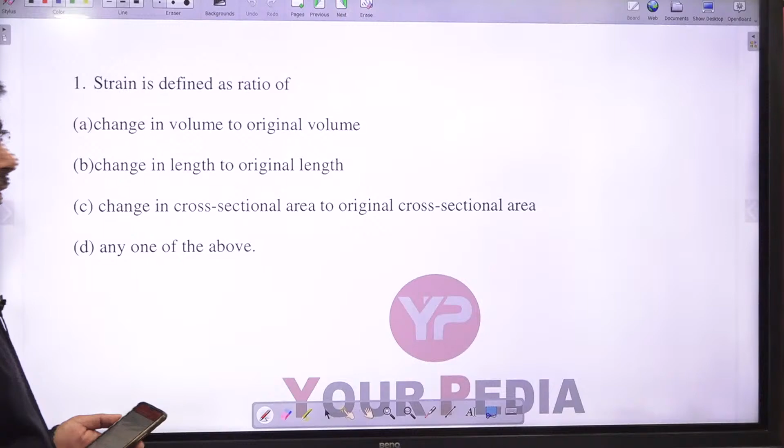You can see the first question on your screen. Just see it and tell me the correct answer. The first question is: strain is defined as the ratio of what? Tell me which one is the right answer.

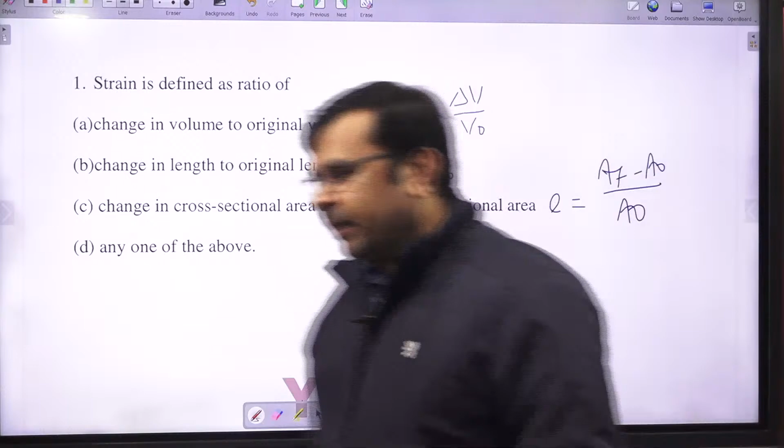So the correct answer is option D. Strain can be represented in any form - that's why the correct answer is option D. Here it was not asked to find the longitudinal strain, lateral strain, or volumetric strain specifically; these are all forms of strain. Is that right? Okay, let's see another question.

So this is the next question. During a tensile test on a specimen of 1 centimeter square cross section, maximum load observed was 80 kilonewton and area of cross section at neck was 0.5 centimeter square. Then what is the UTS of the specimen?

Tell me. UTS means ultimate tensile strength. At UTS, the area you can see here is given as 0.5 centimeter square.

As you know, engineering stress can be represented by load, instantaneous load over original area - don't forget to write this expression, P by A naught. So at the UTS point, meaning at the maximum stress point, the load is 80 kilonewton, that is 80 into 10 to the power 3 Newton.

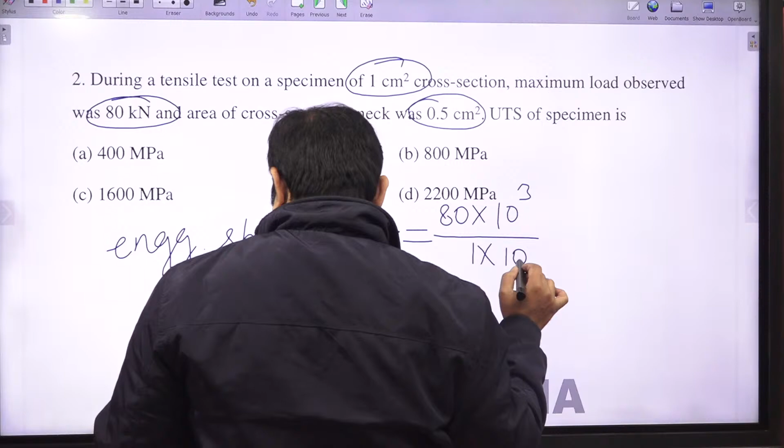And what about area? The original area is 1 centimeter square. If you convert this 1 centimeter into meter... you need to convert centimeter into millimeter, so you just multiply with 100. If you simplify this, then you will get 800 megapascal. So don't be confused with this area.

So the correct choice will be option B. Yes, most of the students gave option B.

Suman Mandal, you make a mistake.

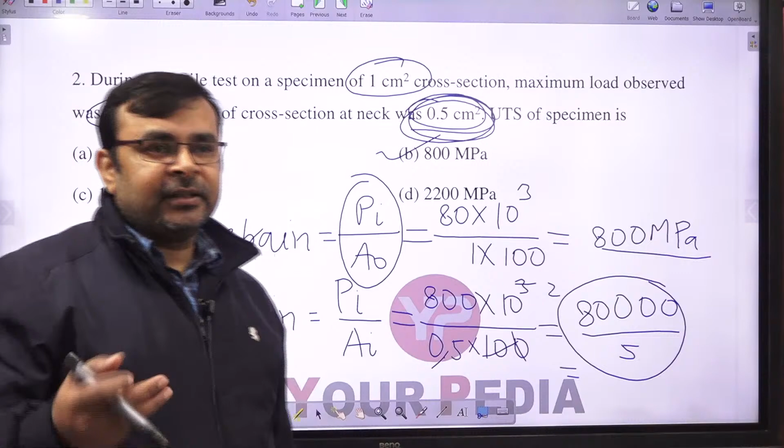Whenever nothing is mentioned, we always calculate engineering stress. Is it right? Okay, so what about this question?

Another question, again from strength of materials. You can see I am putting all the questions in a sequential manner. First I am putting strength of materials questions, then design, then mechanics, like this. So tell me, the Young's modulus and the Poisson's ratio for a certain material are stated to be 1000 GPa and 0.25 respectively.

The bulk modulus of the material will be, tell me, which one is the right answer. Anyone? Answer quickly, answer quickly. You have only 1 minute to solve this question in your final exam, so try to solve it within 1 minute.

So the Young's modulus and the Poisson's ratio, you can see here in this question, Young's modulus is given as 1000 GPa, and the Poisson's ratio is given as 0.25. The bulk modulus of the material, so you need to find out bulk modulus, that is K. So as you know, we have one relation for this: E is equal to 3K into (1 minus 2 mu).

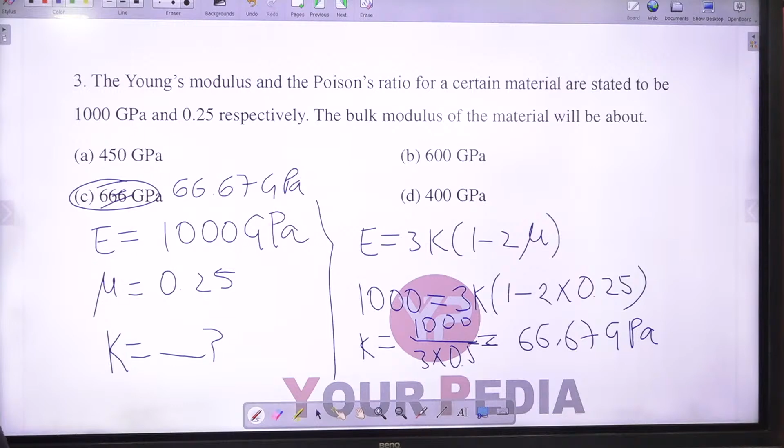66.67 GPa. After solving this, you will get 66.67 GPa. I think here we have one mistake. This is 66.67 GPa, not 666. Is it right? This is a typing error, so forget it. The correct answer is option C.

A bar having a cross-sectional area of 700 millimeter square is subjected to axial load at the position shown, PQRS. You need to find out the stress in the QR position.

So the previous one, 66, I don't know if it's right. You just calculate this: 1000 divided by 1.5. I'm not calculating. Is it 66.67 or 666? Tell me, 666 is the right answer, yes or no? If it is right, then this is right, no issue.

Okay, so just remember this formula. This is very important, and most questions in these kinds of exams come from elastic properties relations and simple bar analysis. A few questions also come from the combined stresses chapter. So let's see one by one.

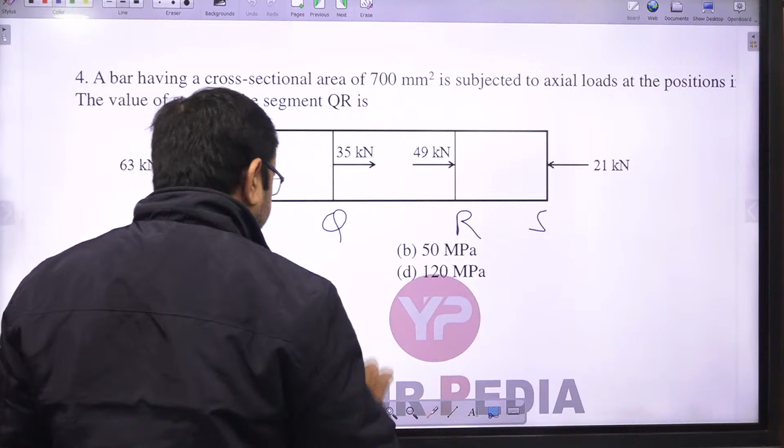So tell me, what is the right answer for this question? The value of stress in the segment QR, tell me. You need to draw its free body diagram and find out the net load acting on the QR section. You need not draw a free body diagram for every section, because we only need to calculate stress in the QR section. So you just cut the section somewhere here, and when you cut the section and look towards the right...

...you get 49 kilonewton towards the right. If that is taken as positive value, then this is a negative value. So the net force acting on it is nothing but 28 kilonewton. Here I am taking the sign convention that force towards the right is positive and towards the left is negative.

Since this value is positive, this difference is positive, therefore the direction of this net force is towards the right. And if it is acting like this, then the reaction will also act like this, yes or no. The net value is 28 kilonewton. Now you have area, you have force, so you can easily find out the stress, yes or no.

So are you getting how to draw a free body diagram for any section? Tell me, if you have any doubt, then you just tell me.

Summation of this force is not zero. Okay, you just leave it.

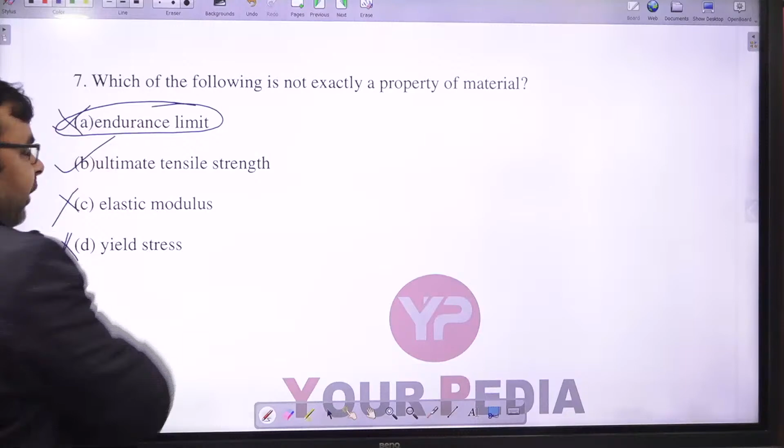तो ये आंसर नहीं होंगे। एंड्योरेंस लिमिट की अगर मैं बात करूं तो एंड्योरेंस लिमिट इज आल्सो प्रॉपर्टी ऑफ द मटेरियल, तो ये भी आंसर नहीं हुआ। तो करेक्ट आंसर अल्टीमेट टेंसाइल स्ट्रेंथ है। ऑल्दो एंड्योरेंस लिमिट जो होता है वो सरफेस कैरेक्टरिस्टिक्स पे भी डिपेंड करता है, बट हम इसको प्रॉपर्टी कह सकते हैं फॉर अ गिवन मटेरियल, ये प्रॉपर्टी होती है।

विच ऑफ द फॉलोइंग की हैव सेल्फ अलाइनिंग प्रॉपर्टी? इन सभी कीज में कौन सी की है जो सेल्फ अलाइनिंग प्रॉपर्टी रखती है? टेल मी।

यील्ड स्ट्रेस मस्ट बी आंसर ना? यहाँ पे क्वेश्चन पूछा क्या है, नॉट एग्जैक्टली अ प्रॉपर्टी। आप एग्जैक्ट प्रॉपर्टी की बात कर रहे हो, अगर आप एग्जैक्ट प्रॉपर्टी बोलोगे तो होगा आंसर। प्रॉपर्टी कौन सी नहीं है ये क्वेश्चन पूछा गया।

ओके, सो टेल मी विच वन इज द राइट आंसर। सेल्फ अलाइन प्रॉपर्टी कौन सी कीज में होती है? यस, वुडरफ की इज द राइट आंसर।

ओके, नेक्स्ट क्वेश्चन, M12 इंटू 1.25 रेस्पेक्टिवली रिप्रेजेंट्स, यहाँ पे क्या बताता है ये। दिस इज द डेजिग्नेशन ऑफ, this is the designation of screw thread, yes or no, screw thread, tell me which one is the right answer.

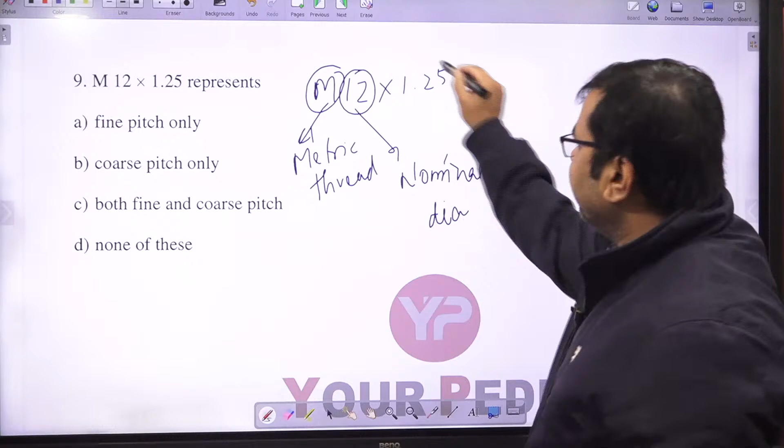और 1.25 जो यहाँ पे बता रहा है दोस्तों ये पिच को बताता है, और जब भी फाइन पिच होती है तो हम इसको इस तरीके से रिप्रेजेंट करते हैं। अगर यहाँ पे कोर्स पिच होगा तो डायरेक्टली इसको M12 से रिप्रेजेंट किया जाता है, पिच को नहीं बताया जाता। तो जब भी फाइन पिच होती है तो पिच भी बताते हैं इस डेजिग्नेशन में। इज इट राइट, तो ये याद रखना, ऑप्शन ए इज द राइट आंसर।

Okay, next question. A 60 mm long and 6 mm thick fillet weld carries a steady load of 20 kilonewton along the weld. The shear strength of the weld material is equal to 200 megapascal. The margin of safety is. बताओ इसका क्या आंसर होना चाहिए? Tell me which one is the right answer.

बोलो which one is the right answer? Anyone? फटाफट बता दो क्या आंसर है.

A 60 mm long and 6 mm thick. देखो जो फिलेट वेल्ड है उसकी लेंथ यहाँ पे गिवन है, वो लेंथ है 60 मिलीमीटर, और थिकनेस T दिया हुआ है 6 मिलीमीटर। अगर आपको पता हो थ्रोट हाइट, तो ये 0.707 टाइम्स ऑफ T होता है, तो यहाँ से आप थ्रोट की हाइट निकाल सकते हो, 0.707 इंटू 6 मिलीमीटर।

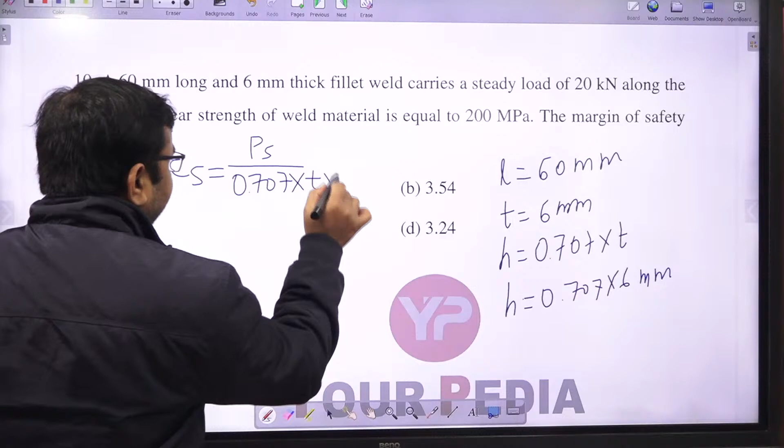इस मैक्सिमम स्ट्रेंथ की वजह से इसकी मैक्सिमम लोड कैरिंग कैपेसिटी जो होगी वो PS होगी डिवाइडेड बाय shear एरिया, तो shear एरिया क्या लिख सकते हैं दोस्तों हम, 0.707 इंटू T इंटू L, और यह नथिंग बट इसको थ्रोट हाइट कहते हैं। तो यहाँ से PS क्या मिल जाएगा, 0.707 इंटू T इंटू L इंटू टाउ।

अब यहाँ पे इसकी वैल्यू पुट करो तो क्या वैल्यू मिलेगी, 0.707 इंटू 6 इंटू लेग लेंथ इज गिवन 60, एंड शियर स्ट्रेंथ इज आल्सो गिवन 200 मेगापास्कल। सो यहाँ से आपको टोटल फोर्स पता चल जाएगा, और चूंकि किलो न्यूटन में चाहिए तो इसको 1000 से डिवाइड कर दूं तो ये किलो न्यूटन में मिल जाएगा। तो ये बताता है, दिस इज द मैक्सिमम लोड कैरिंग कैपेसिटी ऑफ दिस फिलेट वेल्ड।

तो आपसे पूछ रहा है कि मार्जिन ऑफ सेफ्टी क्या होगा, तो मार्जिन ऑफ सेफ्टी या फैक्टर ऑफ सेफ्टी की अगर मैं बात करूं तो टोटल लोड कैरिंग कैपेसिटी डिवाइडेड बाय अप्लाइड लोड।

तो यहां से आपको पता चल जाएगा कि मार्जिन ऑफ सेफ्टी यहाँ पे क्या है। तो आफ्टर कैलकुलेशन आप चेक कर लेना, मैं यहाँ पे कैलकुलेशन नहीं करने जा रहा हूं, तो यहाँ पे इसकी वैल्यू आती है

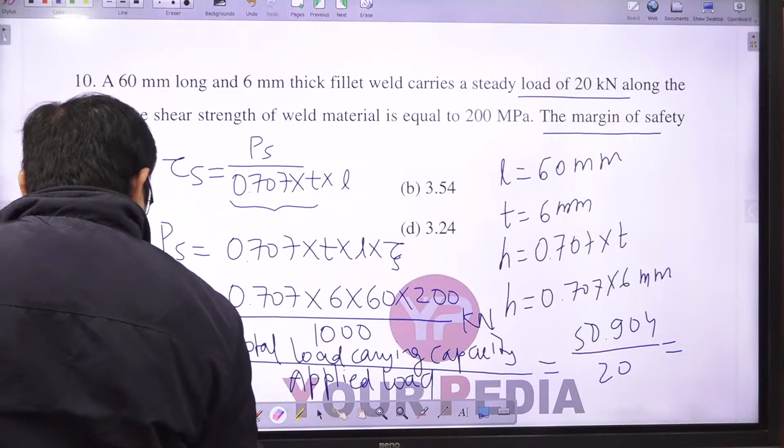904 kilonewton divided by 20, or after solving this we will get, तो ये सॉरी ये फैक्टर ऑफ सेफ्टी है, दिस इज नॉट मार्जिन ऑफ सेफ्टी, दिस इज फैक्टर ऑफ सेफ्टी।

एंड यहां से फैक्टर ऑफ सेफ्टी की वैल्यू आती है दोस्तों 2.54, and after getting this factor of safety, जो मार्जिन ऑफ सेफ्टी होगा यहाँ पे, तो सिंपली यहाँ पे लिख सकता हूँ मार्जिन ऑफ सेफ्टी इज नथिंग बट फैक्टर ऑफ सेफ्टी माइनस 1।

2.54 माइनस 1, that is 1.54, 1.54 is the right answer, so option C is the right one.

देखो कैलकुलेटर नहीं चलेगा, लेकिन आपको कई बार ऐसे कैलकुलेशन देखने को मिलेंगे और आपको करना पड़ेगा, तो अप्रोक्सीमेशन लेके आप इनको सॉल्व कर सकते हो।

इसलिए मैंने यहाँ पे कुछ क्वेश्चन रखे हैं, कई बार हमें कुछ कैलकुलेशन करनी पड़ती है, तो जब भी आप इस तरीके के कैलकुलेटिव क्वेश्चंस देखें तो पहले फर्स्ट स्टेप में उसको स्किप करना है। अगर मैं यहाँ पे स्टेप बताऊं कि आपको पेपर कैसे अपीयर होना है, सो व्हेनेवर यू अपीयर इन द एग्जाम, ऑब्वियसली दिस इज सीबीटी एग्जाम, सो फर्स्ट आपको क्या करना है कि उन क्वेश्चन को सॉल्व करना है जो आपको 100% पता है।

उन क्वेश्चन को देखते जाओ, फटाफट टिक करते चले जाओ। जिस क्वेश्चन में आपको कैलकुलेशन थोड़ा सा लेंथी लगे, उसको आप वहां पे छोड़ दो, उसको मेंशन कर दो कि इसको बाद में चेक करना है, नहीं तो आप क्वेश्चन बाद में ढूंढ ही नहीं पाओगे। मेंशन इस तरीके से करना कि आपको पता है कि इस क्वेश्चन को आप सॉल्व कर सकते हो, लेकिन थोड़ा सा लेंथी है जिसे मैं बाद में करूंगा। उसके बाद आपको क्या करना है, एक बार पूरा...

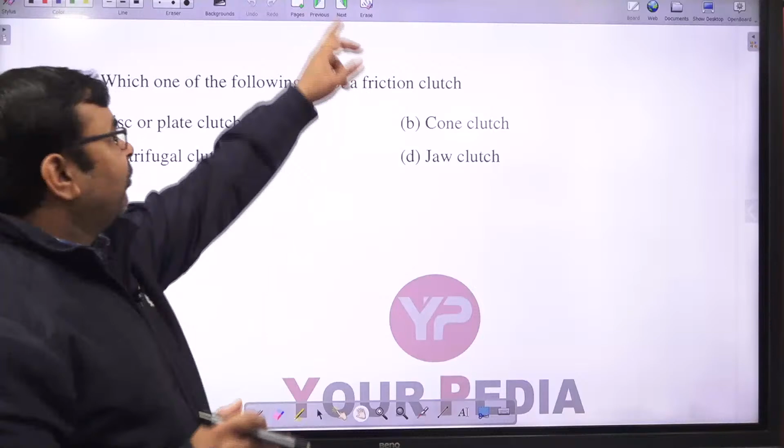पूरा पेपर सॉल्व करके आगे बढ़ जाओ, जब आपके पास टाइम बचे तो फिर इन क्वेश्चंस को ट्राई करोगे। फर्स्ट टाइम आपको ऐसे क्वेश्चन ट्राई नहीं करने हैं जो लेंथी कैलकुलेशन हो, जैसे इसमें कैलकुलेशन काफी ज्यादा है, इसको बाद के लिए छोड़ देना है, अगर टाइम बचे तो करना, अदरवाइज इसको छोड़ देना है। तो इस तरीके से आपको स्ट्रेटेजी फॉलो करना है।

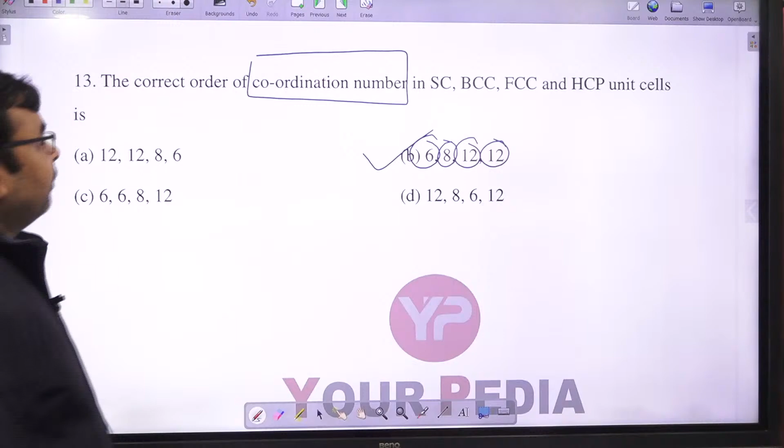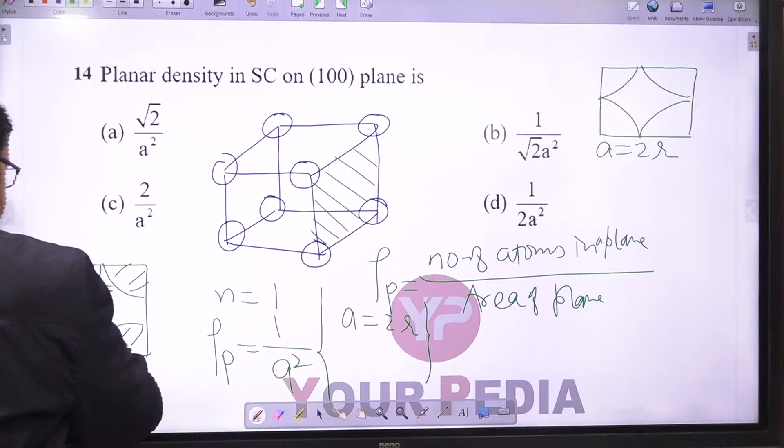तो यहाँ पे अगर हम देखें तो ए इज इक्वल टू 2r। सो अगर आप एरिया निकालोगे तो यही आएगा, और प्लेनर डेंसिटी निकालना है तो नन ऑफ द करेक्ट आंसर। यहाँ पे मैं ऑप्शन ई ऐड कर देता हूँ, 1 by a square, दिस इज द राइट आंसर।

And this is simple cubic, is it right? अगर ये सिंपल क्यूबिक की जगह बॉडी सेंटर्ड क्यूबिक होता है बीसीसी, तब यहाँ पे कुछ स्टोरी बदल जाती है। बीसीसी केस में 100 प्लेन में अगर आप एटम देखते तो उस केस में आपको नंबर ऑफ एटम तो 1 ही मिलता, लेकिन अगर मैं यहाँ पे रिलेशन लिखता तो कुछ और मिलता। तो यहाँ पे सिंपल क्यूबिक की जगह बीसीसी रहा होगा, उस केस में आंसर मिल सकता है। अदरवाइज इसके लिए हमारा करेक्ट आंसर 1 by a square है।

तो ये आपके प्रोसेस होती है, नंबर ऑफ इफेक्टिव एटम्स पता करो डिवाइडेड बाय एरिया ऑफ प्लेन, तो ये आपको मिल जाएगा प्लेनर डेंसिटी। और अगर लीनियर डेंसिटी निकालना होता है तो नंबर ऑफ एटम्स इन वन लाइन डिवाइडेड बाय लेंथ ऑफ दैट लाइन, इस तरीके से हम लीनियर डेंसिटी भी निकाल सकते थे। तो अभी इस पर्टिकुलर प्रॉब्लम में 1 by a square is the right answer।

Okay, so what about this? Brittle fracture is more dangerous than ductile fracture. Why? Because... tell me which one is the right answer. No warning sign, crack propagates at a very high speed, no need for extra stress during crack propagation, all of this.

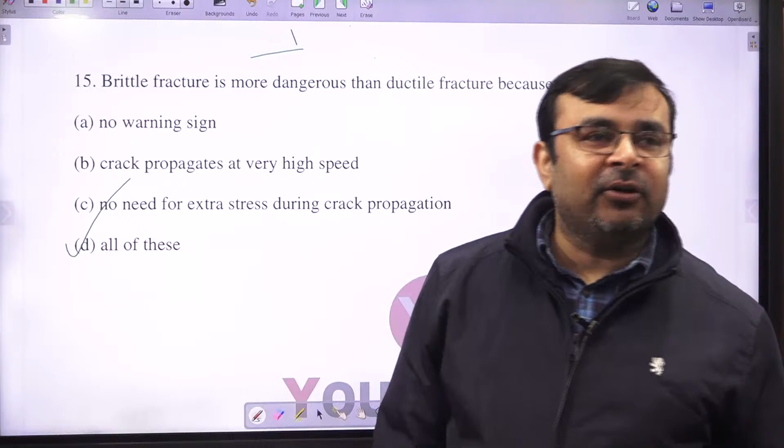अगर सपोज, अगर मैं ब्रिटल मटेरियल ग्लास की बात करता हूँ, उसमें अगर सिंपल से एक स्क्रैच फॉर्म कर दो तो वो स्क्रैच पूरा प्रोपोगेट हो जाएगा। और इसका आपने बहुत बढ़िया से फील किया होगा, आपके मोबाइल का टफन ग्लास है, उसमें जरा सा भी कहीं भी क्रैक बना तो पूरा का पूरा ग्लास में वो क्रैक फॉर्म हो जाता है। दैट इज कॉल्ड क्रैक प्रोपोगेशन। ब्रिटल मटेरियल में क्रैक प्रोपोगेशन बहुत फास्ट होता है, इज इट राइट?

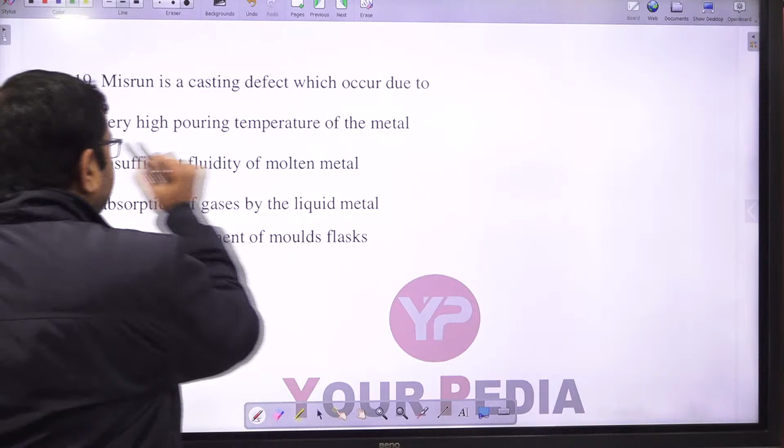So the correct answer is insufficient fluidity of the molten metal, and mostly it happens in case of ferrous alloys, because ferrous alloys have low fluidity.

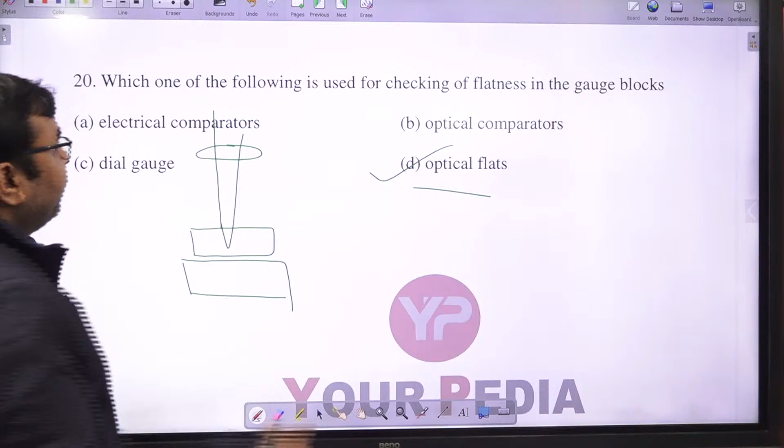So optical flat is the right answer. Okay, next: keeping the surface area constant, if the volume of casting is doubled by changing its design, the solidification time is expected to increase by the factor.

Tell me which one is the right answer. Which one is the right answer?

Keeping the surface area constant, here we need to find out the solidification time. You know that solidification time is directly proportional to V by SA whole square, where V is the volume and SA is the surface area. So we can simply write this is K times V by SA whole square, correct? Now here, we are keeping the surface area constant.

If the volume of the casting is doubled, then the solidification time is expected to change accordingly. So you can see the solidification time is directly proportional to volume square. So TS2 by TS1 is equal to V2 by V1 whole square. And here it says the volume of the casting is doubled, so this simply becomes 2 square, that is 4, since 2V by V is 2 square, so here we get 4. So the correct answer is 4 - the solidification time will increase 4 times.

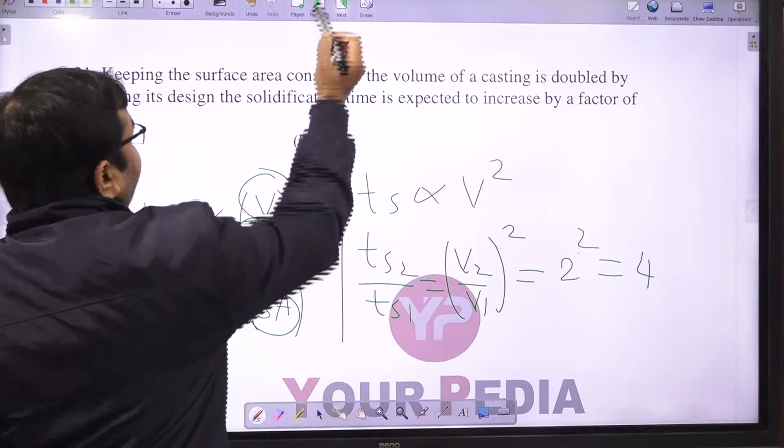Which one of the following materials is best suited for optical flat? Another question from optical flat. Very good, very good. Quartz is the right answer. Quartz is the right answer.

Thread rolling is restricted to - ferrous material, ductile material, hard material, or none of these. Which one is the right answer? Ductile material. Thread rolling cannot be performed on hard material.

Why? Tell me which one is the right answer. Yielding occurs - yes, option B is the right answer. Hard material cannot be rolled because of elastic recovery of the material. Is it right? Huge elastic recovery takes place.

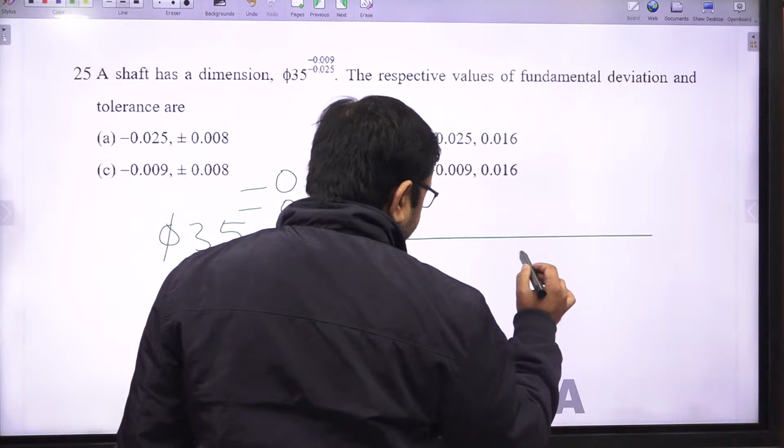The respective values of fundamental deviation and tolerances are - what is fundamental deviation and tolerances? You can see, this is a shaft. Yes, here I am talking about shaft. So let us suppose this is a shaft. This is shaft, is it right? So from this is the reference.

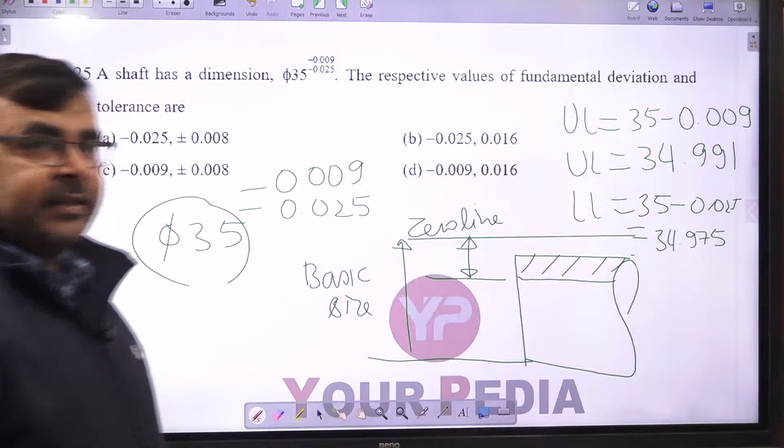34.975 - yes or no? Is it right? So you have upper limit, you have lower limit, correct? So first let me tell you what fundamental deviation is - it is the nearest deviation, correct? So which deviation is nearest here?

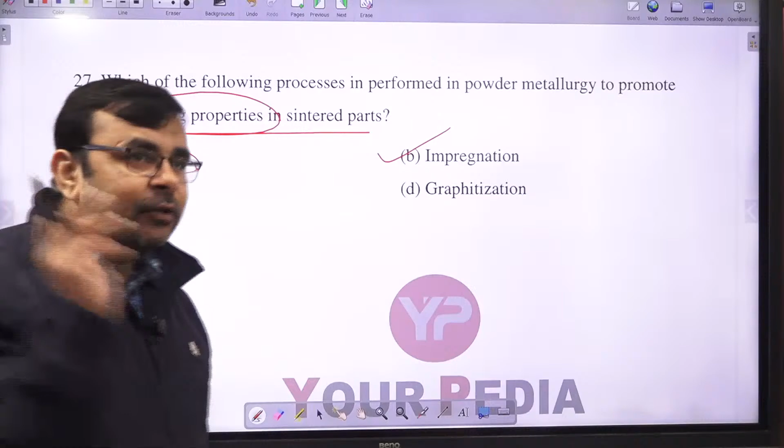Similarly, if I talk about infiltration, in this the porous part is dipped into liquid metal to reduce the porosity of the part. Yes or no? So this is called infiltration. So in infiltration we dip our part in liquid metal, yes or no? And in impregnation we dip our powder metallurgy part in lubricating oil. Yes or no, is it right? So this is the difference.

And questions from both of these definitely appear in the exam. Okay, next: in orthogonal cutting process, rake angle of the tool is 22 degree and friction angle is 26 degree. Using merchant shear angle relation, the value of shear angle will be - tell me.

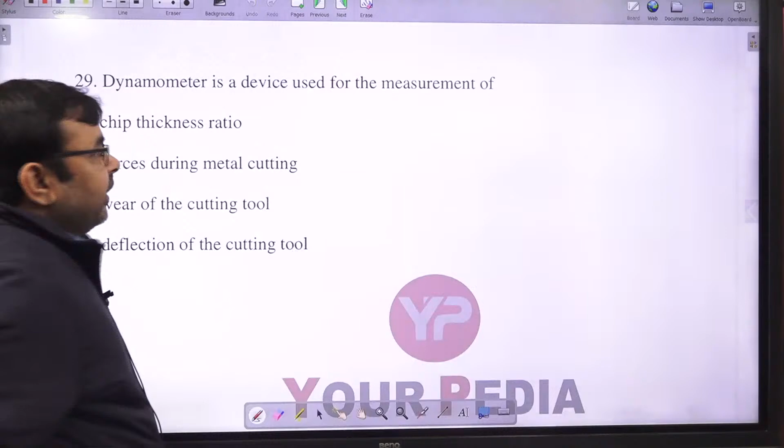Tell me, is it right or not? 2φ plus beta minus alpha, so 90 plus alpha minus beta. Alpha is 22 degree, beta is 26 degree. Yes, Kapil, check again. Tell me, is 43 the right answer or not? Tell me. Yes, option C is the right answer. Very good, option C is the right answer. Here you should not make such small mistakes - sometimes seeing a simple question you make a mistake, so on simple questions you need to be a little more conscious.

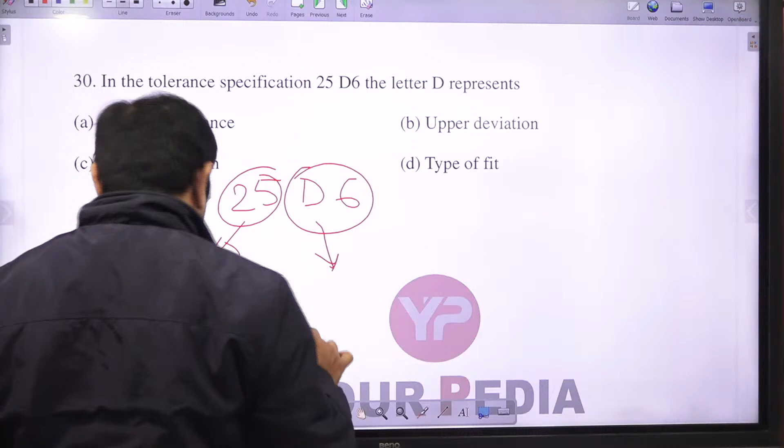See, whenever we have this kind of thing, this represents nominal diameter, yes or no? Nominal size, correct? And this represents a type of fundamental tolerance, types of fundamental deviation. You have seen like this.

Here we have a zero line, exactly over this we have capital H, yes or no? And exactly below this you have small h, correct? After that you can see it is looking like this F. So actually this represents deviation, fundamental deviations, correct?

And this 6 represents tolerance grade, that is IT6, yes or no? So the correct answer is lower deviation. Upper deviation is called fundamental deviation in case of shaft, yes or no? Or if I talk about hole, this is upper deviation for shaft and lower deviation for hole.

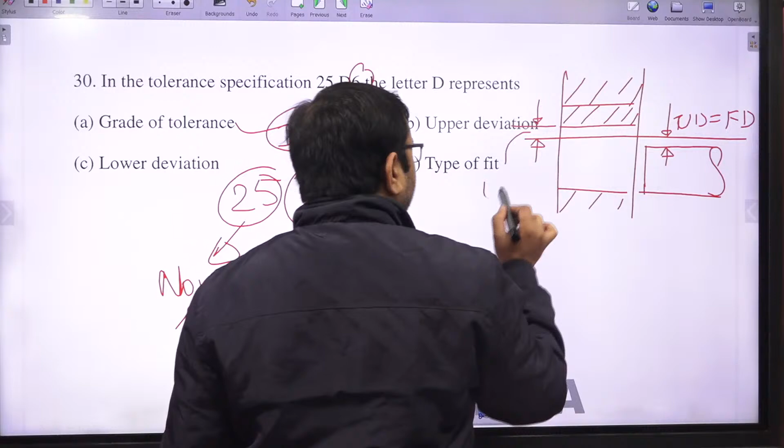Let's see here. Let's suppose this is a hole, is it right? This is a hole and this is tolerance, is it right? And this is the basic line, and similarly this is shaft. So in this case you can see this lower deviation is a fundamental deviation for hole, and this upper deviation is the fundamental deviation for shaft. This upper deviation is called fundamental deviation, and this lower deviation is also called fundamental deviation, yes or no?

And this 6 represents types of grade of tolerance. So here we need to find out what the letter D represents, is it right? Here our question is letter D. And capital D, obviously if you see this is a capital D. So capital letter is always used for hole, yes or no?

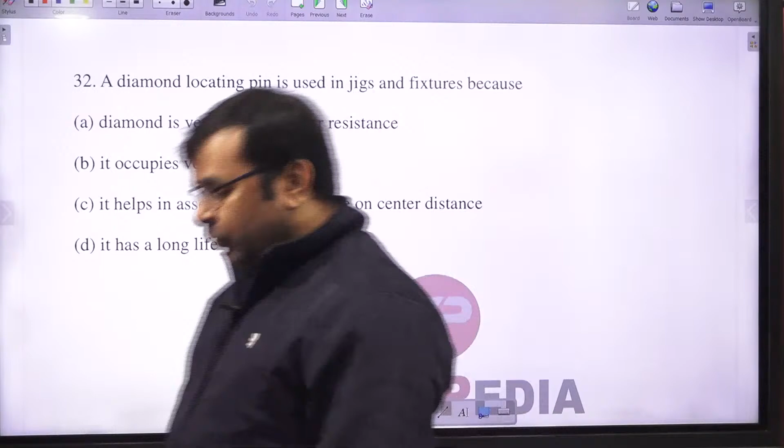Okay, next: a diamond locating pin is used in jigs and fixtures because - tell me which one is the right answer. Diamond is very hard and wear resistant. It occupies very little space. It helps in assembling with tolerance on the center distance. It has a long life. So, which one is the right answer?

It helps in assembly with tolerance on center distance. Yes, option C is the right answer. Very good, Mukesh. Ram Prasad, very good, option C is the right answer.

In the 3-2-1 principle of fixture design, 3 refers to... tell me which one is the right answer. Is it the number of clamps required, locators on the primary datum face, degree of freedom of the workpiece, or operations carried on the primary datum face? Yes, option B is the right answer: locators on the primary datum face.

Let's suppose you have a three-dimensional object like this. So on the bottom face we put 3 locators, similarly on this face we put 2 locators, and on this one we put only 1 locator. So this is 3, this is 2, this is 1 - so 3-2-1 represents the locators, or simply you can say a pin. In a CNC machine, a feed drive stepper motor with step angle 1.8 degrees drives a lead screw with pitch of 2 millimeters.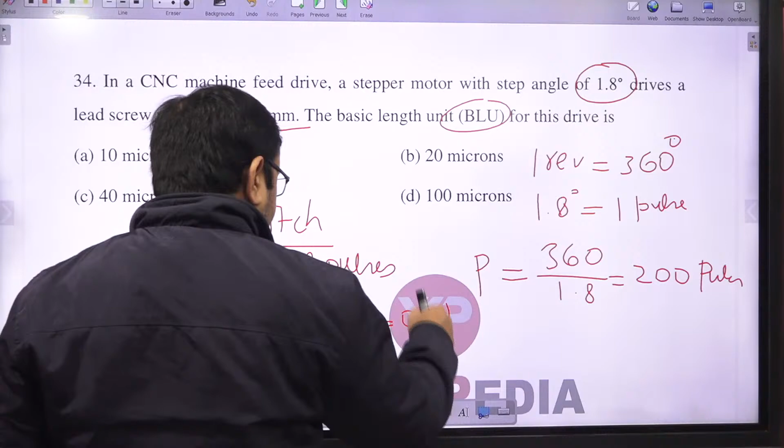0.01 millimeter. And if you want to convert this into micrometer, since this is in millimeter, you just need to multiply this 0.01 by 1000, and it will become micrometer. Correct.

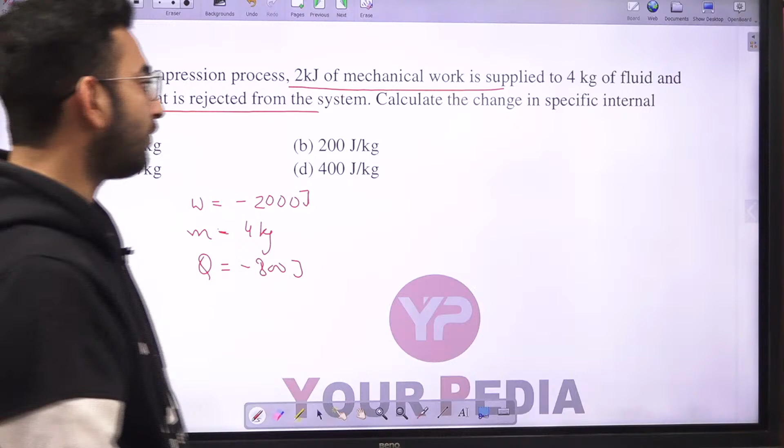So here you can see the heat is rejected from the system, that means the heat is given to you as minus 800 joule, and you want to calculate the change in specific internal energy. So you can easily calculate this by the first law of thermodynamics, which states that Q is equal to delta U plus W. So here Q is given as minus 800, and the corresponding value of delta U will come out as plus 1200. But in this question we have to calculate the specific internal energy, which is the total change in internal energy related to the 4 kg of fluid. So the change in specific internal energy will become 1200 divided by 4, that is 300 joule per kg. So option number C will be the correct answer of this question.

Okay, so now let's move to our next question, that is question number 45. In which of the following processes is there an increase in entropy with no degradation of energy? Can anyone provide me the answer of this question? Just wait a minute. Okay, so just tell me the answer of this question, option A, B, C or D, and please mention the question number also. So in which of the following processes will there be an increase in entropy with no degradation of energy?

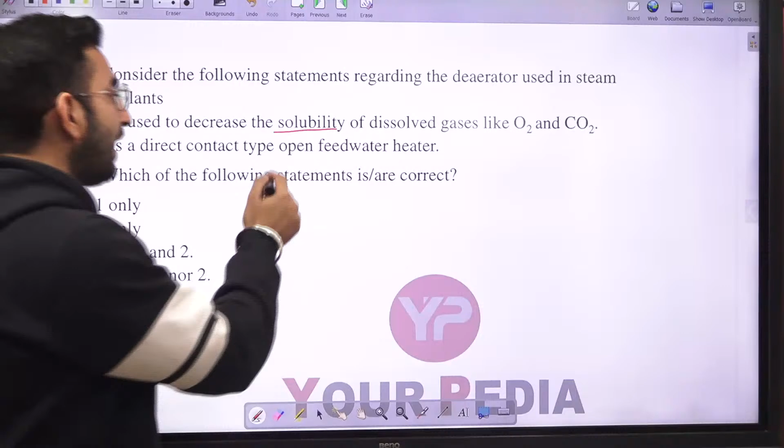The main function of the deaerator is to decrease the solubility of dissolved gases, so statement one is correct, and we normally use the deaerator in the Rankine cycle as an open feed water heater. So option C, that both statement 1 and 2 are correct, is the answer here. That you have to understand.

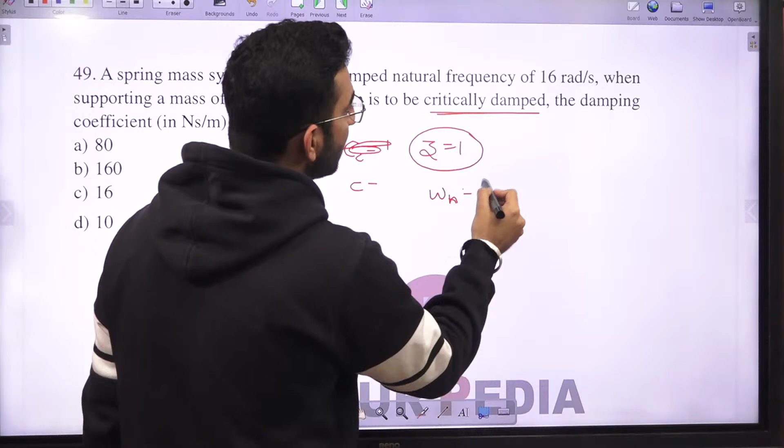So basically, in the case of a critically damped system, we already know that C by M is equal to 2 zeta omega n. But here the zeta is given as 1 because the system is critically damped. So here I can say the C will be equal to 2m into omega n.

So here you can see the corresponding value of m is given as 5 kg, and the corresponding value of omega n is given as 16. So that means the answer will be 160 Newton second per meter. Option number B will be the correct answer of this question, that is question number 49.

Let's move to our next question, question number 50. In this question, we have been provided with a flywheel which is having a mass of 300 kg, and a corresponding radius of gyration of 1 meter, and it is given a spin of about 100 rpm. The vertical axis of the whole assembly is rotating at a corresponding speed of 6 radian per second, and we have to calculate the corresponding gyroscopic couple which is experienced by the system. So basically, you already know that the gyroscopic couple is given by I into omega into omega p.

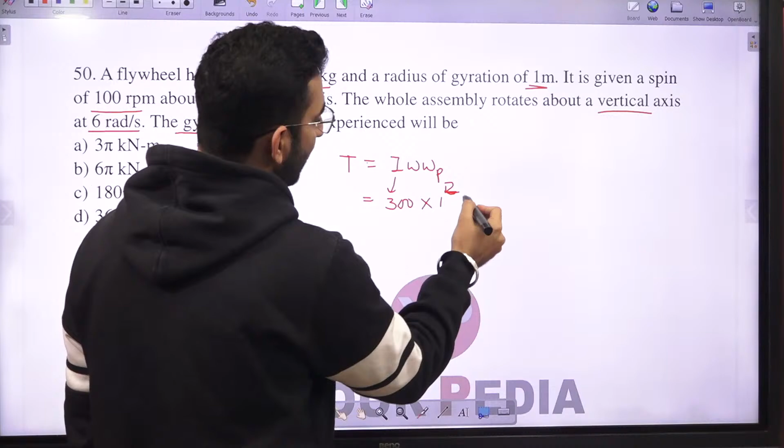That's the formula of the gyroscopic couple. So here you can see the corresponding I will be written as the mass into the corresponding square of radius of gyration, that is 300 into 1 square, and the corresponding value of omega. Omega you can easily calculate by this expression: 2 pi into 100 by 60, and the omega p is given to you as 6 radian per second.

Okay, so if you solve this part, you will get your answer as 6,000 pi Newton meter. So here I can say the answer will be 6 pi kilonewton into meter. Manish, your answer is correct. Option number B will be the correct answer of this case.

So here in question number 51, we have been provided with the regenerative Rankine cycle, and the corresponding enthalpies are given at different points, that is H1, H2, H3, and H4. We have to calculate the total amount of heat supplied to the boiler. It's a very nice question actually. Here just see, we have to neglect the pump work. Just try to solve this part, it's a very interesting question actually.

So if you see in this question, we have to calculate the heat supplied, and it is a case of a regenerative Rankine cycle. So here you can see correspondingly the fluid is entering into the boiler at point number 7 and it is exiting the boiler at point number 1. So here I can say the corresponding amount of heat supplied is equal to H1 minus H7. That means in order to calculate the heat supplied in the boiler, we have to calculate the enthalpy at point number 7.

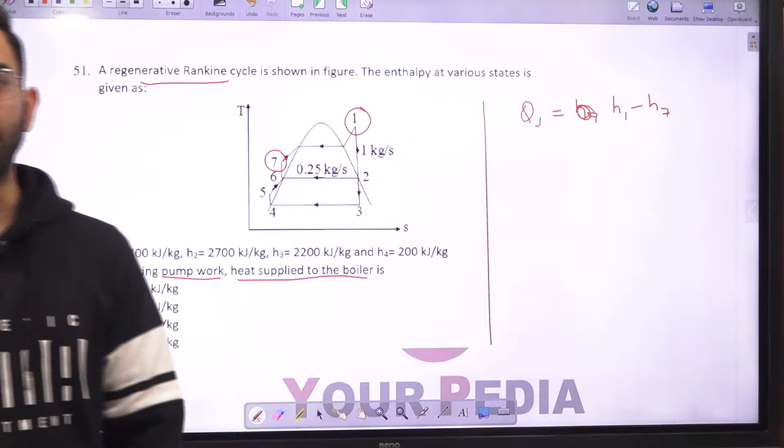So here you can see, if you want to calculate the enthalpy at point number 7, then first of all we have to calculate the enthalpy at point number 6 by doing the energy balance. So here if I do the energy balance in the case of regenerator, so here you can see the corresponding energy balance will be...

So here you can see the enthalpy at point number 2, which is having a flow rate of 0.25 kilogram per second, is mixing with the 0.75 kilogram per second of steam at point number 5. So here I can say 0.25 into H2 plus 0.75 into H5 is equal to H6.

Okay, so here first of all just understand, we have to neglect the pump work. So basically if the pump work is neglected, here I can say the corresponding value of the enthalpy at point number 4 is nearly equal to the enthalpy at point number 5. And the corresponding value of the enthalpy at point number 6 is nearly going to be equal to the enthalpy at point number 7.

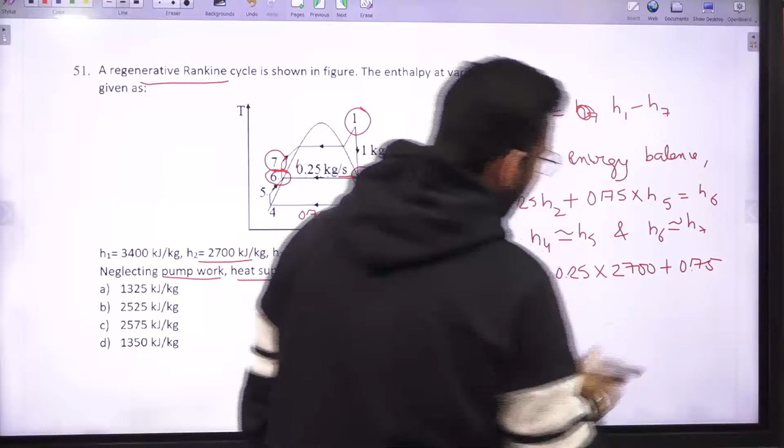So just put all the values into this expression and get the value of H6 here. So here you can see the corresponding value of H6 will be 0.25, and you know the value of H2 as 2700, and here you can see the corresponding value of enthalpy H5. H5 is equal to H4, so here multiply by 200. Just get the value of this H6.

Okay, and once you get the value of H6, just put the value in this expression and you will get the corresponding value of the amount of heat supplied into the boiler. So in that case, the answer which you are going to get will be option number C, that is 2575 kilojoule per kg. You just have to calculate this value of the enthalpy at point number 6, and then put this value into the final expression of the heat supplied into the boiler.

Okay Mani, it's not question number 60, it is question number 51.

Let's move to question number 52. Here we have been provided with a 4-link mechanism in which the dimensions of the links are given in standard units of length, and we have to determine what type of mechanism it is. Out of the 4 links, link number 3 is the shortest link, having a length of 4 meters.

Here you can see if the shortest link is opposite to the fixed link, then the corresponding input and output links will be rockers. That means it is a double rocker mechanism. Option B will be correct in this case. It's a very simple question actually.

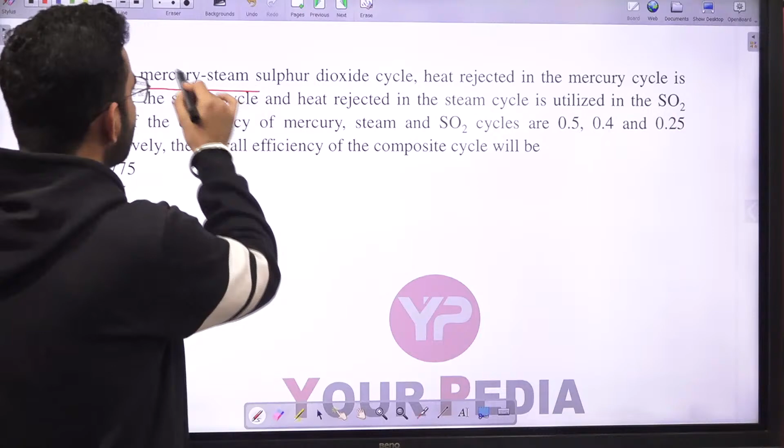In this question, we are provided with a mercury-steam-sulfur dioxide cycle where heat rejected in the mercury cycle is given to the steam cycle. So basically it is a combination of three cycles: mercury, steam, and sulfur dioxide cycle. The heat rejected in the mercury cycle is given to the steam cycle, and the heat rejected from the steam cycle is utilized in the sulfur dioxide cycle.

The individual efficiencies of the cycles are 0.5, 0.4, and 0.25, and you have to calculate the overall efficiency of the composite cycle. Can anyone provide me the answer of this question? Just try to solve it.

Just remember, whenever you want to calculate the overall efficiency, the overall efficiency and the corresponding efficiencies of the individual cycles are related by this formula: 1 minus overall efficiency equals the product of (1 minus individual efficiencies) of all the cycles.

So here you can see: (1 minus 0.5), (1 minus 0.4), (1 minus 0.25). If you solve this, you get 1 minus 0.225. Therefore, the overall efficiency of the cycle will be equal to 0.775. That means option A will be the correct answer to this question.

Let's move to question number 54. Two paths are shown in the figure, one reversible and one irreversible, to change the state of the system from A to B. Some options are given here. A is the initial state and B is the final state, and we move from state A to state B by two corresponding paths, one irreversible and one reversible.

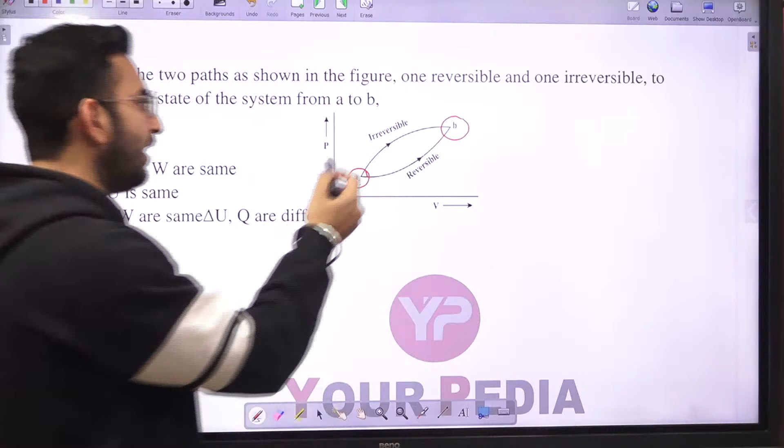First of all, it's clear that for both of these processes, the corresponding heat transfer and work transfer will be different, because these two quantities are path functions. The corresponding change in energy will remain the same, because it is a point function - it depends only on the initial and final states. So here I can say delta U will be the same in this case.

Mani, your answer is correct, that is option number B. Delta U is the same in this case, and Q and W are going to be different.

So the next question is: which one of the following represents the condensation of a mixture of saturated liquid and saturated vapor on an enthalpy-entropy diagram? Can anyone provide me the answer to this question?

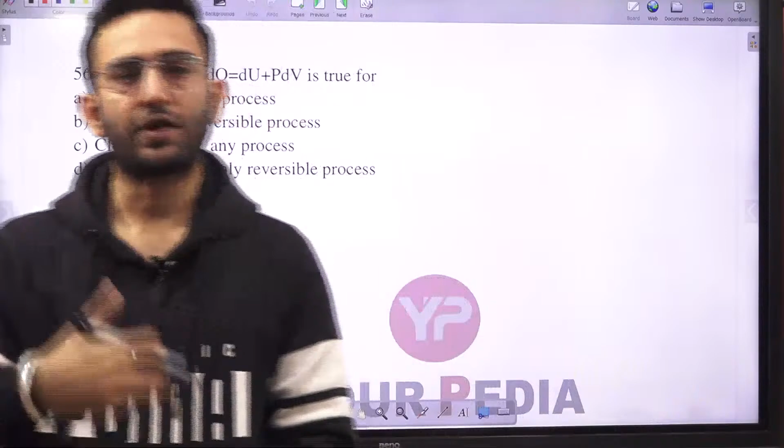जब भी कोई थर्मोडायनेमिक्स से इस तरह के क्वेश्चन पूछे जाते हैं कि फर्स्ट लॉ ऑफ थर्मोडायनेमिक्स को जब डिफरेंट फॉर्म में रिप्रेजेंट करते हैं, तो कौन सी इक्वेशन कहां पे वैलिड होगी यह देखना होता है। जैसे अगर इस क्वेश्चन को फ्रेम किया जा सकता है, del q इज इक्वल टू du प्लस dw, du प्लस pdv। सबसे पहले ध्यान रखना है, if the du is mentioned, that means it is representing the closed system, and the pdv work is only possible in the case of reversible process. So basically this equation is representing the closed system, but only for the reversible process, because here the work is mentioned as pdv.

लेकिन अगर यहाँ पे pdv की जगह simply dw होता तो उस केस में आप इस इक्वेशन को रिवर्सिबल एज वेल एज इरिवर्सिबल किसी भी प्रोसेस के लिए यूज कर सकते हो। सो अकॉर्डिंग टू दिस पर्टिकुलर इक्वेशन द ऑप्शन नंबर डी विल बी द करेक्ट। तो 56 का आंसर क्लोज सिस्टम ओनली रिवर्सिबल प्रोसेसेस होगा। इन केस अगर मैं इक्वेशन को इस वे में मेंशन करूं, dq इज इक्वल टू du प्लस dw, उस पर्टिकुलर केस में क्लोज सिस्टम एनी प्रोसेस, तब ऑप्शन नंबर सी करेक्ट रहेगा। अगर इस ढंग से इक्वेशन मेंशन करते हो तो वो ओपन सिस्टम, किसी भी सिस्टम के लिए यूज कर सकते हो, चाहे रिवर्सिबल प्रोसेस हो या इरिवर्सिबल प्रोसेस।

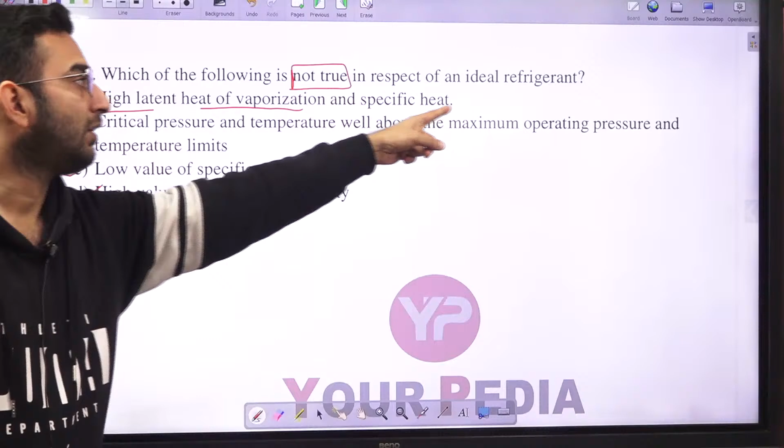So question number 57: which of the following is not true in respect of ideal refrigerant? We have to mark the incorrect statement out of this. First option is high latent heat of vaporization and specific heat, critical pressure and temperature well above the maximum operating pressure. Option number B is perfectly correct. Low value of specific volume, that is also correct. High value of thermal conductivity, that is also correct. In the case of ideal refrigerant, it is much better if it has high latent heat of vaporization, but the specific heat - this particular term is not correct here. So option number A will be the incorrect statement out of these four.

ओके, तो ये थोड़ा सा अंडरस्टैंडिंग वाला क्वेश्चन है, अगर आपके कंसेप्ट बिल्कुल क्लियर हैं, so if you are clear with your concepts, then you can easily calculate the corresponding mass of air in this question. So what has been provided in this question? We have been provided with a room which is having a dimension of 7 into 4 into 4 meter.

So here you can see the corresponding dimensions of the room are 7 into 4 into 4. We have been told that it is occupied by an air water vapor mixture which is having a temperature of 38 degrees Celsius, and the atmospheric pressure is 1 bar, and the relative humidity is given as 70%. We have to calculate the mass of air present in the system.

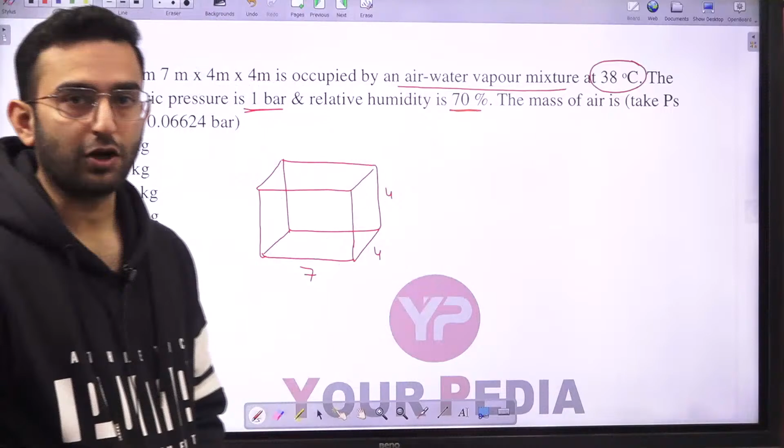First of all, understand it is mentioned in the question that the atmospheric air is not saturated air, it is unsaturated air because it is having a relative humidity of 70%. So here I can say the corresponding vapor pressure of the water vapor present in the air is going to be equal to phi into PVS.

Here the phi is given as 0.7 and the corresponding value of PVS is given as 0.06624. From there you can easily calculate the vapor pressure. What you have to calculate now is the value of the mass of air. Let me calculate this value for you. The answer for this particular vapor pressure comes out to be around 0.046368. That's the vapor pressure of the water vapor.

So now if the total pressure is given as 1 bar and the corresponding vapor pressure of water vapor is as calculated, then the vapor pressure of the dry air is going to be equal to total pressure minus vapor pressure, that is 1 minus 0.046368. This will provide the value of the pressure of the dry air present in the room. I don't have this exact value, I'm just writing the final expression.

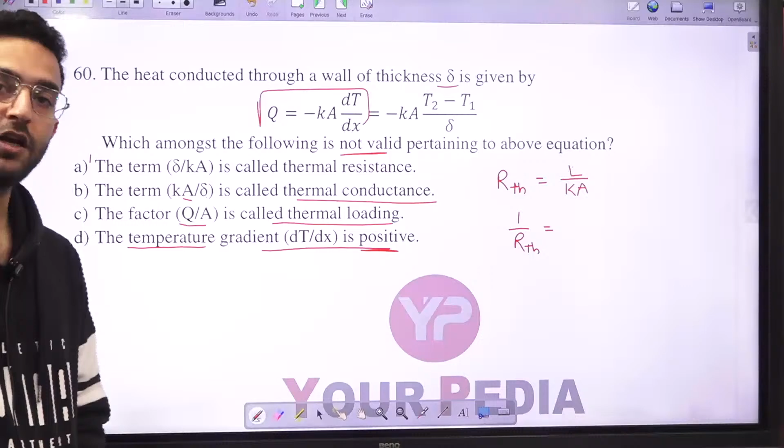The next thing is Q by A, which is also known as thermal loading and is also called heat flux. So statements A, B, C are correct. Now, in conduction heat transfer, the temperature gradient is always negative, because according to the second law of thermodynamics, heat always flows from high temperature to low temperature. That means option D is correct. In order to make Q positive, we have to use a negative sign in the final expression.

Question number 61: the temperature distribution in a cylindrical rod with heat generation is given by this formula - this is a direct formula-based question. For a cylindrical rod with heat generation, the variation of temperature with radius is given by Qg capital R square divided by 4k, times 1 minus r square upon capital R square, plus Tw. That's the general expression for calculating temperature distribution in a cylindrical rod with heat generation.

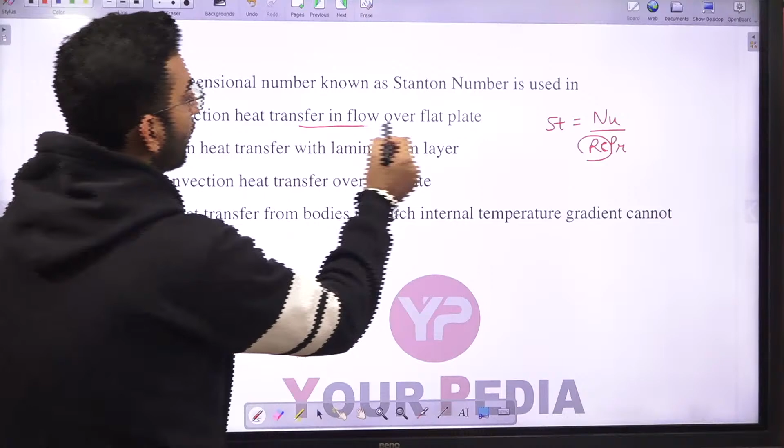Question number 62: the non-dimensional number known as Stanton number is used in the case of convection heat transfer. The Stanton number is defined as the ratio of Nusselt number to the product of Reynolds number and Prandtl number. This number is specifically studied in forced convection, because we are dealing with the Reynolds number, and this is a particular case of flow over a flat plate. Option number A is the correct answer in this case.

Now calculate the shape factor in this case - it's a very simple question for two long concentric cylinders. Whenever this type of question arises, make sure whether it is a cylinder or a sphere, because sometimes students mistake it for a sphere and do the calculation, getting the wrong answer. Here it is mentioned that it is two long concentric cylinders, so the area will be pi d1 l, and the area of cylinder number 2 will be pi d2 l.

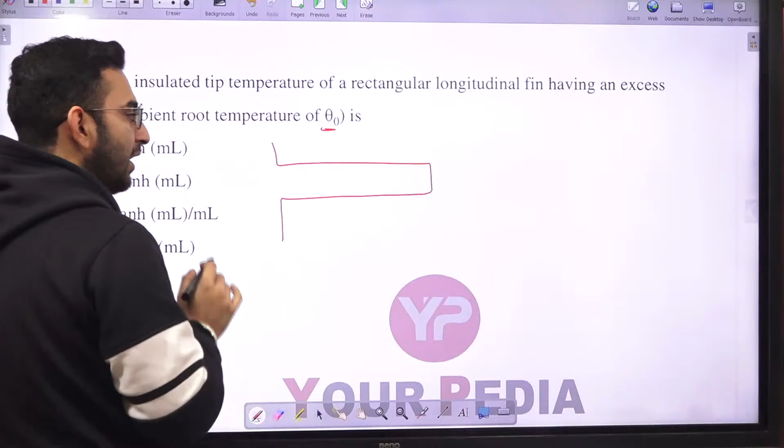Okay, so next question is: the insulated tip temperature of a rectangular longitudinal fin having an excess temperature over the ambient root temperature theta naught is. Okay, so basically it is a question from the fin which is having a case of insulated tip.

In the case of insulated tip, we already know that the ratio of excess temperature, that is T minus T infinity divided by T naught minus T infinity, is given to you as cos H of m times L minus x, divided by cos H of mL. So here you have to calculate the insulated tip temperature, that means you have to find the temperature at this tip.

So if you want to calculate the value of theta at the tip, you have to put x as L. If you put the value of x as L, then L minus L will become 0, and hyperbolic cosine will become 1. So the corresponding value of the insulated tip temperature having excess theta is going to be equal to theta naught divided by cos H of mL. Option number D will be the correct answer in this case.

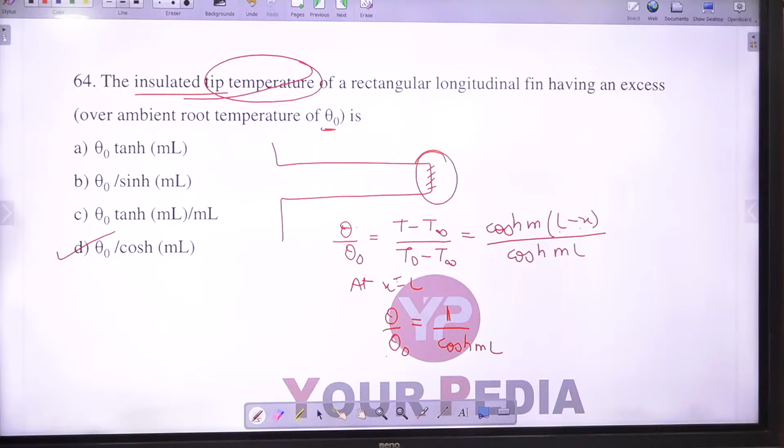Okay, so next question is question number 65. The main advantage of the two-stroke engine over the four-stroke engine is - just see what are the various advantages of the two-stroke engine over the four-stroke engine. Can anyone provide me the answer?

So basically, in the case of two-stroke engine, there will be more uniform torque, and there will be a corresponding power output that is more, and there will be absence of valve also. That means all of these options, option number A, B, C, are the given advantages of the two-stroke engines over the four-stroke engines. So option number D will be the correct answer here.

Next, question number 66. The desirable characteristics of the combustion chamber for the SI engine to avoid knocking. In order to avoid the knocking in the case of SI engine, we have to make sure that the cylinder dimension is very small, that is, the diameter of the bore of the cylinder is very small. So option number A is correct.

The next thing is the short ratio of flame path to the bore, that is also correct. And the next thing, the absence of hot surfaces in the last region of the charge, that is also correct. That means option number D will be the correct answer of this case. All of these statements are the desirable characteristics for the combustion chamber in order to avoid knocking in the case of SI engine.

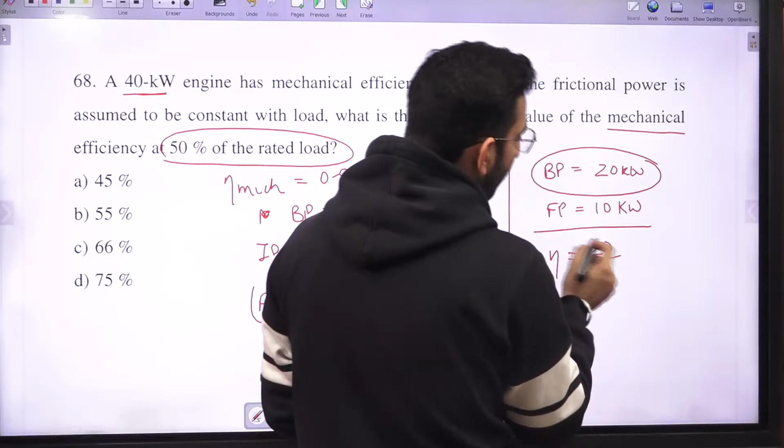No matter what is the rated load, the friction power is going to remain same. Initially the friction power is equal to 50 minus 40, so the frictional power is going to be equal to 10 kilowatt. So when you run the engine with 50% of rated load, the friction power is going to be equal to 10 kilowatt. So the corresponding mechanical efficiency is going to be equal to brake power, new brake power, that is 20 kilowatt, divided by new indicated power, that is 30 kilowatt. So the corresponding value of the mechanical efficiency will become 66.67%.

Simply the ratio of 2/3. So option number C will be the correct answer of this case.

Okay, so now see question number 69.

If the Mohr circle is drawn for a fluid element which is inside a fluid body at rest, first understand the fluid element is at rest and taken inside a fluid. Suppose we have a container with a liquid in a static position, and we take an element here. This element will be subjected to fluid pressure, and it will exert normal compressive stresses on the fluid element.

If I draw the Mohr circle, the normal compressive forces are acting on this element, so the Mohr circle will be represented by this point, with no shear stress in this case. So if the Mohr circle is drawn, it will be represented by a point on the normal stress axis. That means option C is the correct answer.

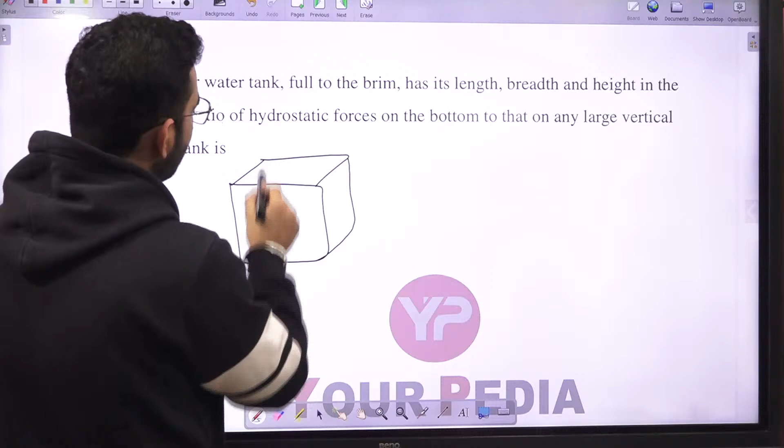Okay, so the next question is question number 70. We have been provided with a rectangular water tank having a ratio of length, breadth and height as 2:1:2. We have to calculate the ratio of the hydrostatic forces on the bottom surface to that of any large vertical surface.

We have to calculate the ratio of the force on the bottom divided by the force on any surface having larger surface area, and the hydrostatic force is given by W A x bar, that is the final expression. The specific weight of the liquid is the same in both cases, so omega remains the same.

The area of the bottom surface is equal to 2 into 1, and the height from the top to the centroid of this area is equal to 2. So it is 2 into 1 into 2, divided by the area of the large vertical surface, which will be equal to 2 into 2.

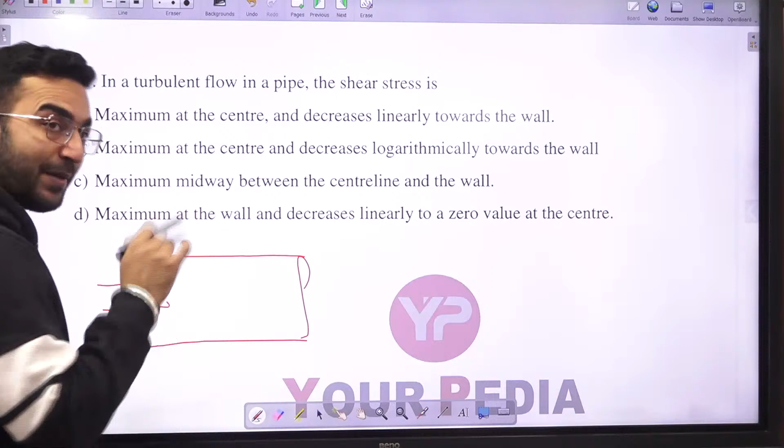The next question is: in a turbulent flow in a pipe, the shear stress is basically... Suppose there is a pipe and fluid is flowing through it. If the flow is laminar, the shear stress varies linearly, with a value of 0 at the center and maximum at the surface, and the corresponding velocity profile is parabolic in nature.

But similarly, if the flow is turbulent, the variation of shear stress remains the same, meaning the shear stress is maximum at the surface and 0 at the center, but the corresponding variation is also linear in nature.

Okay, and where the difference is here, the correspondingly velocity profile will become something like that. That means the velocity varies logarithmically in this case.

Okay, good afternoon Akhil. Okay, YS.

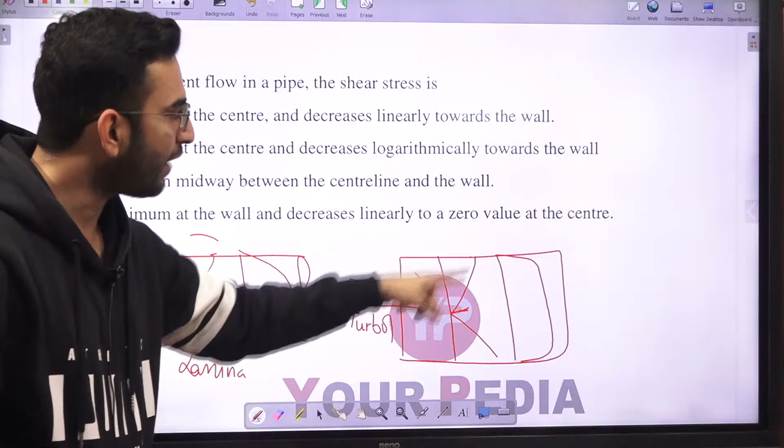For turbulent flow, we normally use the 1/7 power law, and there is also one law, that is the logarithmic variation of the velocity profile. In the case of turbulent flow in a pipe, the shear stress is maximum at the wall, and it decreases linearly to a zero value at the center. That means option D will be the correct answer of this case.

So here's the next question. The shear stress developed in a lubricating oil of viscosity 9.81 poise filled between two parallel plates, having a thickness of 10 centimeter and moving with a relative velocity of 2 meter per second. So here, simply we have to use the Newton's law of viscosity in this case. Just use this expression and provide me the answer.

Just try to solve this part. The viscosity is given as 9.81 poise, convert it into SI units, that is 0.981. The change in velocity is given as 2 meter per second, and dy is given as 10 centimeter, that means 0.1. You just have to solve this. You can see that the answer will come out to be around 19 point something, so 19.62 will be the correct answer of this case. Option number B will be the correct answer of this question.

Okay, so that is question number 73.

The thickness of the turbulent boundary layer at a distance x from the leading edge over a flat plate. So here we have a flat plate over which the fluid is flowing. If the flow is laminar, we have to see the variation of thickness of the boundary layer. In the case of laminar flow, the boundary layer thickness varies as 5x divided by square root of Reynolds number x. That means the boundary layer thickness varies with x as 0.5.

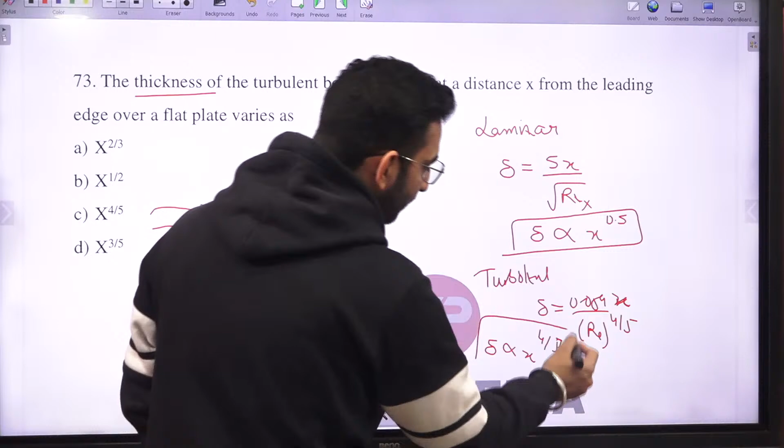But in the case of turbulent flow, this delta is given as 0.059 divided by Reynolds number to the power 4 by 5. So here the correspondingly variation will be delta directly proportional to x to the power 4 by 5. So the answer will be option number C here. In the case of question 73, the answer will be x to the power 4 by 5.

Okay, so now let's move to our next question, question number 74. We don't have sufficient time, so we have to solve a lot of questions in the given time frame.

It is 4 x to the power 4 by 5 here. In the denominator it is 1 by 5, and the correspondingly variation of delta with respect to x is raised to the power 4 by 5. That you have to remember. Okay, question number 74.

In question number 74, we have been provided a U-tube manometer attached to an air pipe, which is reading a height of 20 centimeter of mercury, and we have to calculate the corresponding value of the pressure in the air pipe in kilopascal. Actually a very simple question. We normally have to use the hydrostatic pressure law to convert the meter of mercury into the corresponding kilopascal. According to Pascal's law, pressure can simply be written as rho g h.

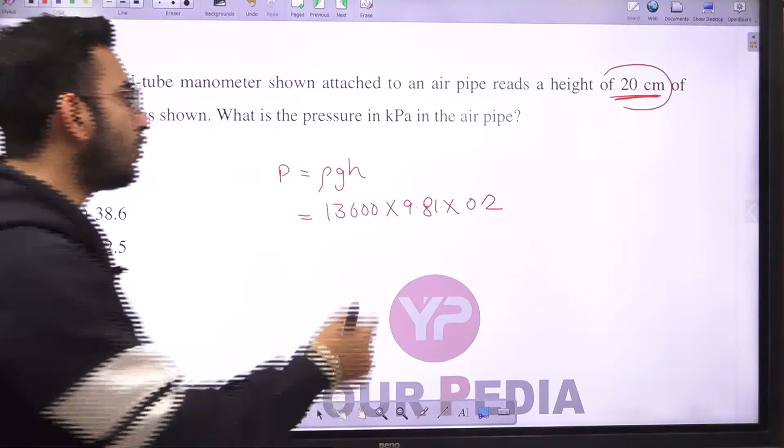The value is given as 20 centimeter of mercury. We have to use the corresponding density value of mercury, which is 13,600, and the corresponding value of gravity is 9.81, and the height is given as 0.2. In this type of exam you don't have sufficient time to do the calculation, so you can easily assume that 9.81 is approximated as 10 meter per second squared. If you take it as 10, you can easily calculate the value, and the corresponding answer will come out to be around 26.7 something.

Okay, that you have to understand. Okay, so now see here.

In question number 75, a liquid of specific gravity 0.82 flows with a velocity of 4.43 meter per second. Its velocity head is given by. That's a very nice question. Just try to solve this question and provide me the answer. You have to calculate the value of the velocity head here.

Can anyone provide me the answer of this question? You have to just provide the value of the velocity head. So first of all, just see here. What is the meaning of velocity head? Velocity head is nothing, it is equal to v square by 2g.

Okay, so you already know the value of the velocity here, that is 4.43 square divided by 2 into 9.81. So here you can see the square of 4.43 is something between 16 to 25, and divided by it is equal to 20. So here the answer will come out to be around option number C, that is 1 meter.

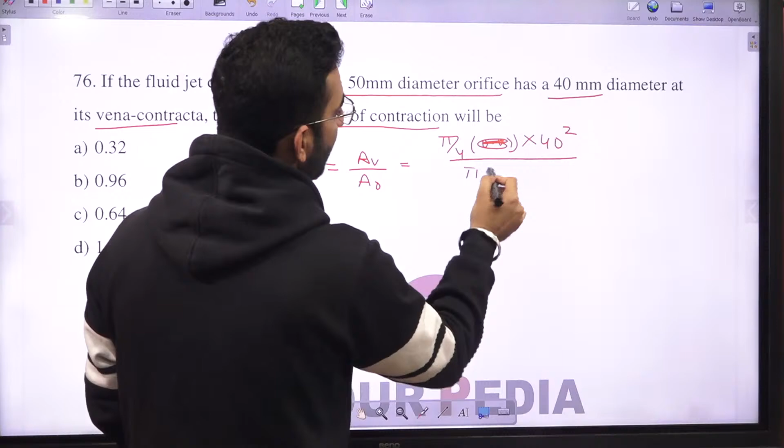Okay, so here you can see the area of the vena contracta can be written as pi by 4 into 0.04, I can say 40 square, divided by pi by 4 into 50 square. So if you just simplify this expression, you will get the answer as 16 by 25, and it will be something equal to 0.64 here.

Okay, so just by looking at the options, you can mark the correct answer here. Option number C will be the correct answer in this case.

Okay, what will be the answer of question number 77? So see here, in question number 77, we have to calculate the degree of freedom.

It's a very simple question. So for calculating the degree of freedom, we can simply use 3L minus 1 minus 2J minus H. That's the final expression. Yeah, you have to consider the redundant degree of freedom also. There is one redundant motion, and we have to subtract it also, that is minus of f of r.

Okay, so here you can see correspondingly links are fixed link, second link, third link, and fourth link. So we have total 4 number of links here, and the joints are: first joint, second joint, third joint. Okay, so here I can say correspondingly the binary joints are 3 here, and there is one more higher pair also.

So here I can say the corresponding value of h is 1 here. Okay, and there is one more redundant motion, that is of roller here, because this motion is not affecting the degree of freedom. So here I can say it is a redundant motion, an unnecessary motion here.

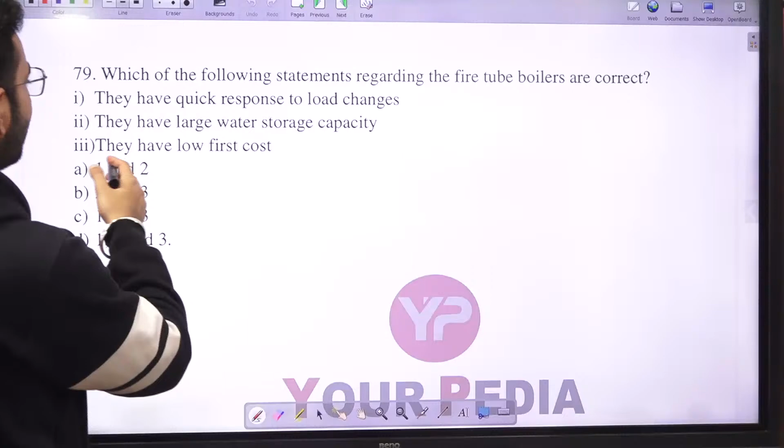Let's move to question number 79. Which of the following statements regarding fire tube boilers are correct? This is basically a simple theoretical question. They have a quick response to load changes, that is correct. They have a very large water storage capacity, that is also correct. And they have low first cost. So option D, all of the statements are correct here.

Okay, question number 80 is very nice. In a balancing of 4-stroke, 4-cylinder inline engine, the firing order helps to control the magnitude of what? So by defining the firing order, are we balancing the primary forces only, or are we also balancing the primary couples? Both primary forces and primary couples? That's what you are trying to say?

Okay, so first of all there is a misconception actually. By defining the firing order, you are actually balancing the primary couples only. No matter what the firing order is, the primary forces are always balanced. So in order to make sure the primary couples are balanced, we have to define the proper firing order. So in question 80, the firing order basically helps you control the magnitude of primary couples only. Make sure you understand this, it's very important, because no matter what the firing order is, the primary forces are normally balanced. So to balance the primary couple, we have to define a particular firing order. That's why it is used to control the magnitude of the primary couples only.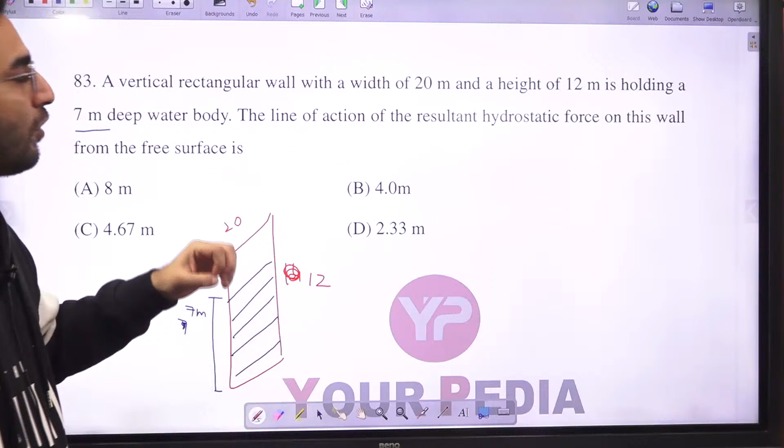To calculate the line of action of the resultant hydrostatic force, we need the center of pressure, because the center of pressure is the point at which we assume the hydrostatic force is acting. Let's say the hydrostatic force acts at point P. The distance from the water's free surface to point P is known as the line of action of the resultant hydrostatic force. For a rectangular wall, this value H can simply be calculated as 2/3 of the total depth. Solving this, you will get the correct answer, which comes out to be around 4.67.

Okay, you can also calculate this by using the expression, that is I upon A x-bar plus x-bar. That procedure is a little bit lengthy, but it will provide you the same answer, don't worry. But if you want to calculate the distance from this surface, I have to use this formula 2/3.

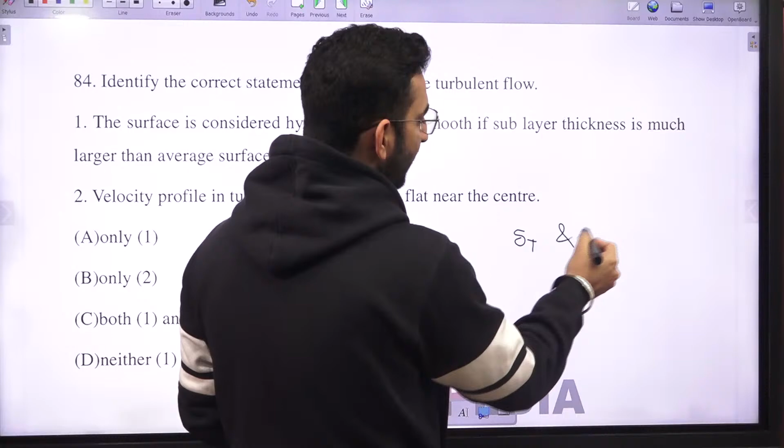So here you can see the surface is considered hydrodynamically smooth if the sublayer thickness is much more than the average surface roughness. That means statement number 1 is correct here. And the velocity profile in turbulent flow is almost flat near the center, that is also correct. That means option number C will be the correct answer of this case.

Let's move to the last question of the test series. In an ideal vapor compression refrigeration cycle, the refrigeration effect is given as 125 kilojoule per kg, the COP is given as 5, and the correspondingly flow of the refrigerant is given as 0.5. We have to calculate the heat rejected in the condenser. First of all, the units of the refrigeration effect is given as kilojoule per kg, and we have to provide the answer in kilowatt.

So if you want to calculate the heat rejected in the condenser, first of all you have to calculate how much work input is there in the compressor. Here the COP is given as refrigeration effect divided by work input. So the refrigeration effect is 125 divided by the COP which is 5, correspondingly the work input will be equal to 25 kilojoule per kg.

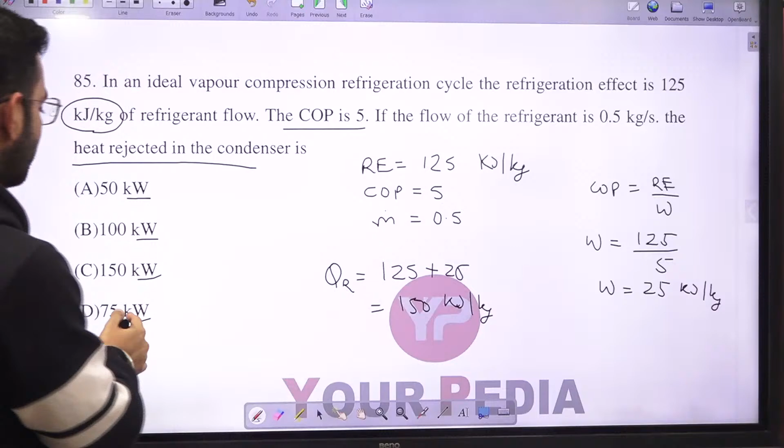That means the heat rejected in the condenser is equal to refrigeration effect plus work input, that is 125 plus 25, that is 150 kilojoule per kg. That's the value of heat rejected in the condenser in kilojoule per kg, but we have to provide the value in kilowatt. So to convert it to kilowatt, we have to multiply it with the mass flow rate, and the correspondingly answer will come out to be around 75 kilowatt. So option number D will be the correct answer of this case.